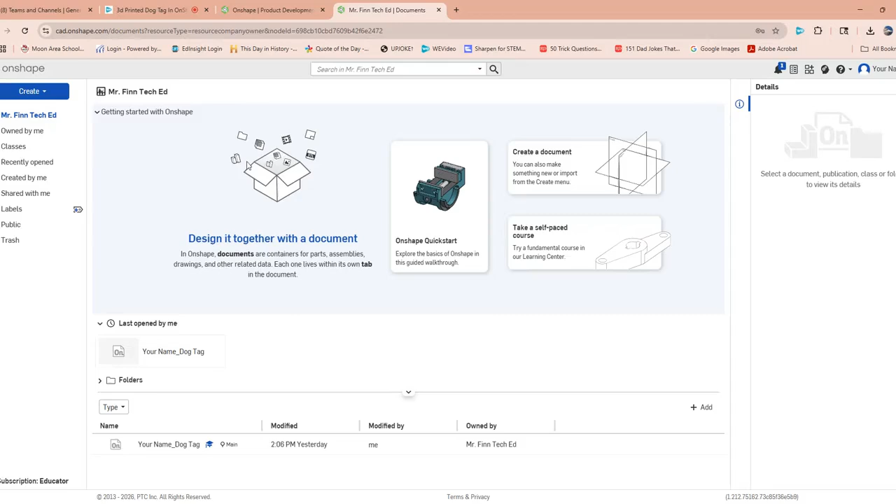All right, from here, you're going to click Classes. You're going to go Mr. Finn Tech Ed 8 or whatever class you're in here. And in this case, I have an assignment out here called Dog Tag. If you've already started it, you can click here.

But if you have not already started it, it'll just take you straight to it. But here, I'm going to click in this little submission document here. It'll take you to where we need to go.

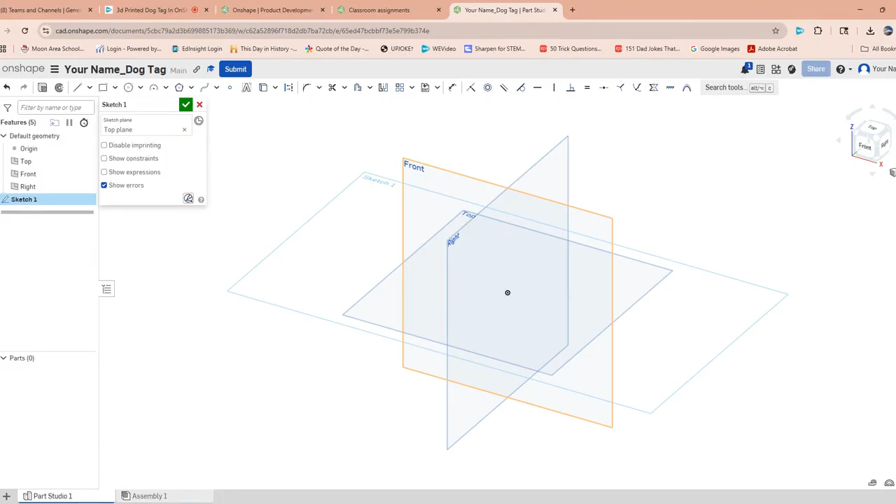Now, in OnShape, we've got a number of different planes here, and we're going to draw this thing in the top plane. So we're going to click Sketch. We're going to click our top plane. And we'll select that. And what you're going to do on the keyboard is you're going to hit Shift 5, which is going to take you to the top view. So now we're looking down on top of this.

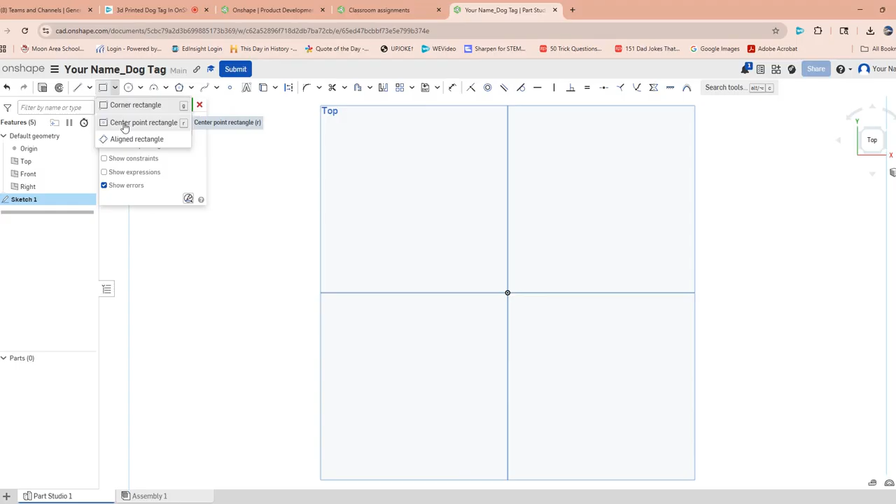Now in this case, we're going to start off by dragging a rectangle. And what we want to do is select a certain rectangle just so it can line up with future drawings. We're going to select center point rectangle. We're going to click that center point and drag out our rectangle. And you can click just one time, left click, and that'll give you the opportunity to set up our length.

And our length here in this case is going to be 2. You can hit tab, and we want to be in inches. And our height here is going to be 1.25. Hit enter. You've got your square drawn.

Now, dog tags don't have square corners, so we do want to create what's called a fillet. A fillet can be done here, still in the sketch menu. We're going to click fillet, or Shift F if you're more comfortable with keyboard commands. Now, fillet, you're going to click these 2 corners. Click, click. And what you're going to do is set that radius at 0.5.

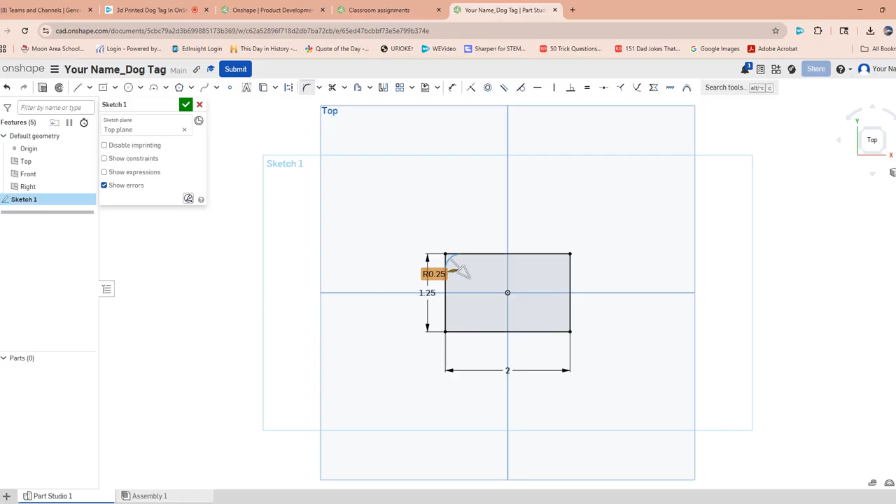0.5. Hit enter. Now that's going to default the other corners, so it should be a little easier for you to do. Just click your corners. Hit enter. Click your corner. Click enter. Click your corner. Click enter. So now we've got that done.

Now the next thing that we want to do is put a hole in this dog tag for our chain to go through. So in this case, we're just going to select center point circle here, or on the keyboard you can use just a regular old C.

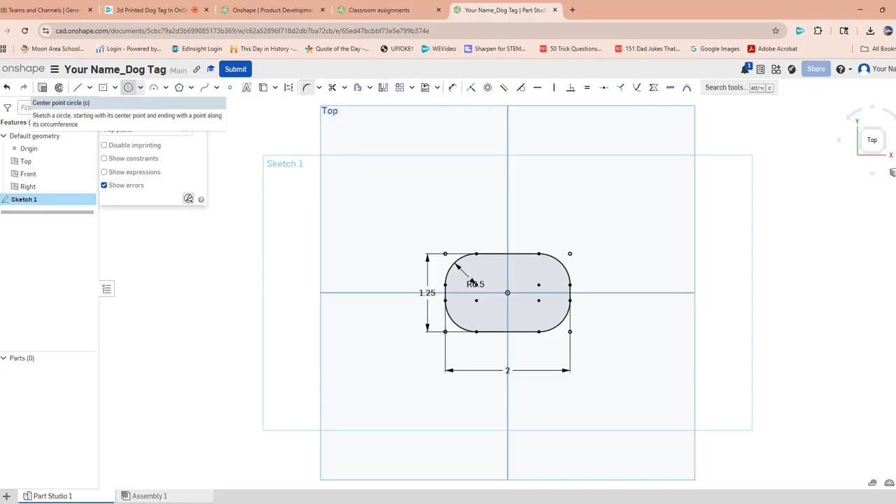We're going to set our center point. You want to zoom in a little bit by rolling in on the mouse wheel here, and you want to kind of find this little edge, and you'll see where it marks the midpoint. You're going to work your way over a little bit. You can put it anywhere for now.

You're going to click and drag that circle out, and you're going to enter the dimension 0.125. And you can click enter. So we've got our hole marked here. Now we've got to get our distance in between the hole and the edge of the tag.

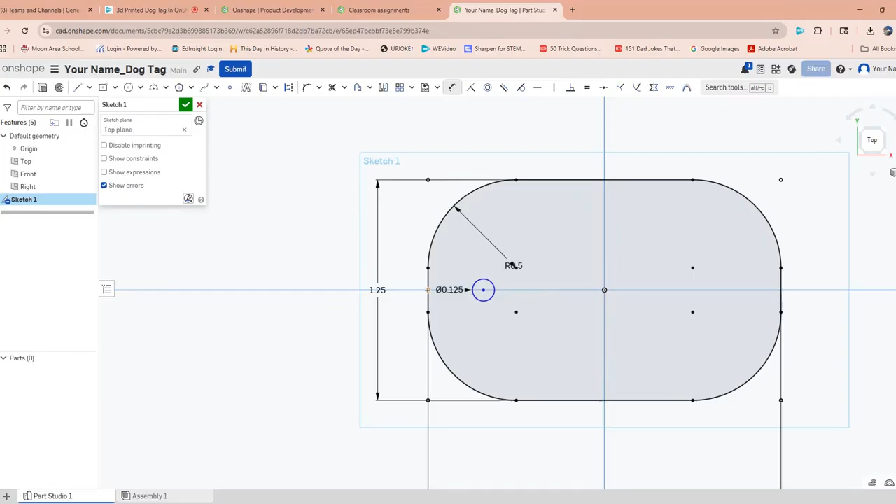And in this case, we're going to have to use the dimension tool. You can either use that or D on the keyboard. Dimension tool. We're going to click our edge, and we're going to click the center of that circle, drag it up here, and we're going to type 0.13 and hit enter.

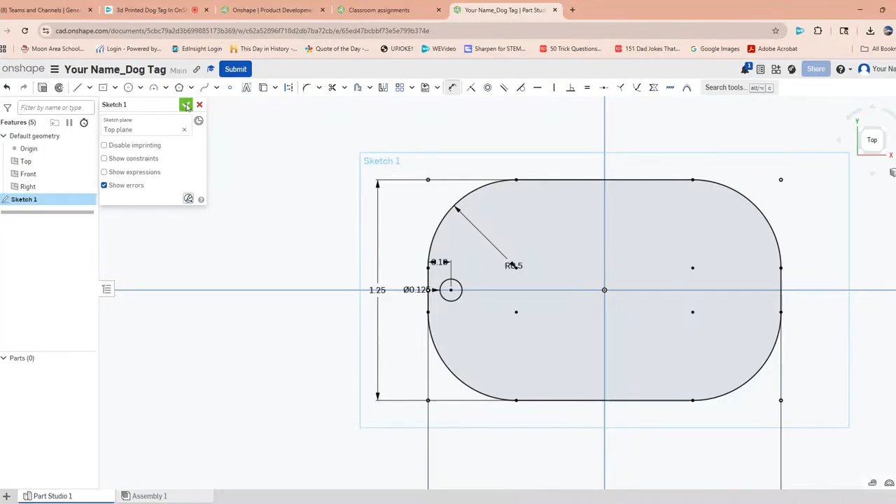So now at this point, we've got the base of our dog tag selected. We can actually go back in here and just say we're done with this sketch. Now it's going to close out that sketch, but if we do a Shift 7, it'll put us in what's called an isometric view. So now we're kind of looking at it.

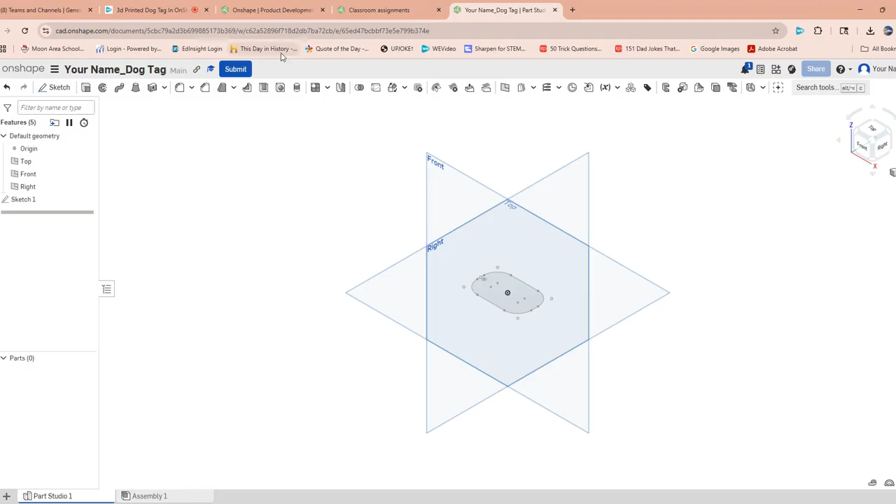This would be almost like this is our 3D printer here. And we're going to use a command called extrude. Now I would zoom in a little bit by rolling in on your mouse, and you click extrude.

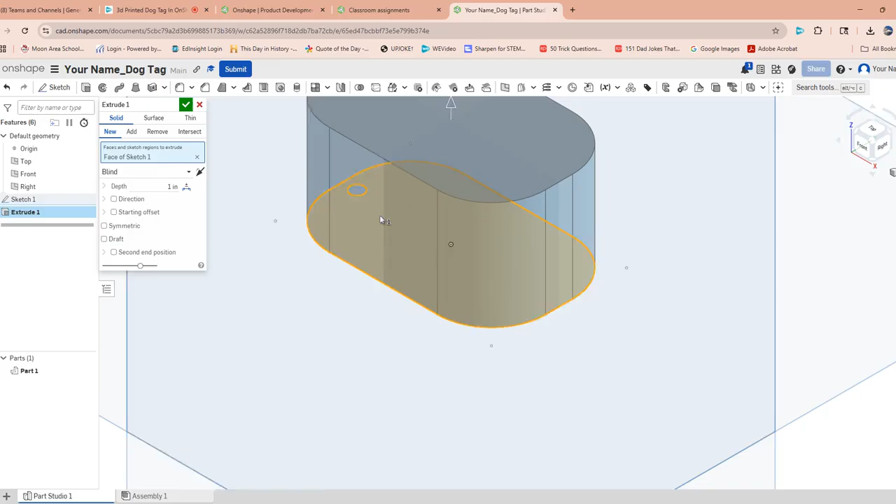We're going to click this shape here. Now, we don't want this center, so hopefully we can avoid clicking that by staying outside of that center area. Click it, and look at that—we start to make this thing 3D. The only difference here is our direction; we're going to come up out of it, which already looks like it defaults to that here in OnShape.

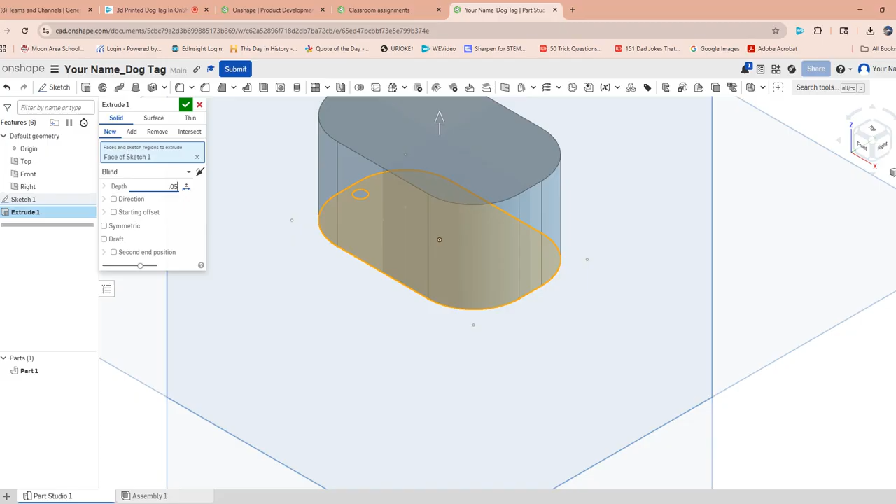From here, we're going to extrude this portion here. We're going to type 0.05, so we now have ourselves a three-dimensional object here. You can click check, and we're in good shape here.

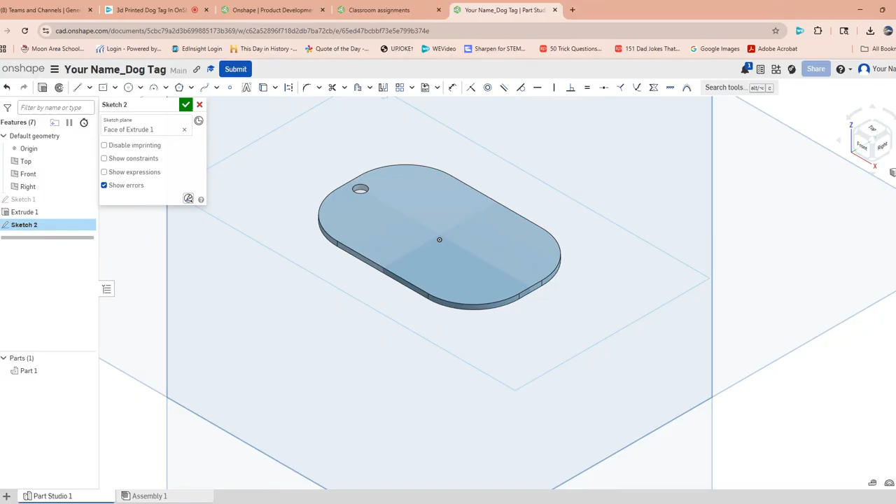Now the next thing we do, we want to give it a little bit of a contour. So if we want to, we can actually create a new sketch. We click this sketch, select the face where you want to do this drawing, and click sketch here. Then we're going to do a Shift 5, which will take us into that top view again.

In this case here, we're going to use a command called offset. Offset is here—as we make our way back, we're still in the Shift 5 view looking down on the top view, and we're going to take our offset command. Scratch that, we're going to need to add a new sketch, pick where we're sketching, and in this case we can use our offset command.

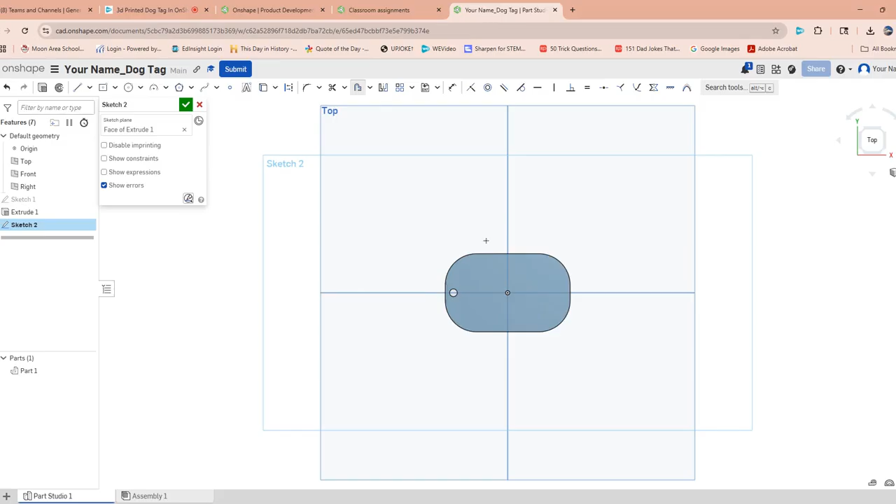And we want to click our arrow here, and we're going to drag this arrow so it's kind of inside. It doesn't have to be any exact science here—that's fine, we're good with that.

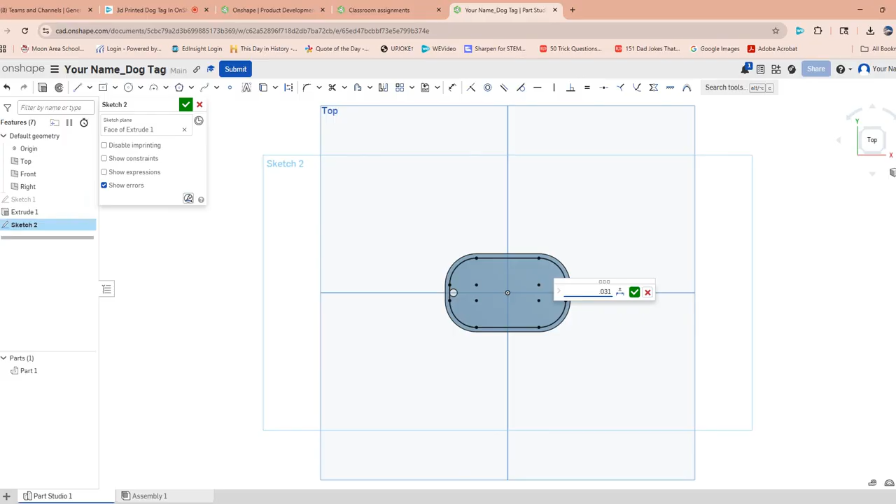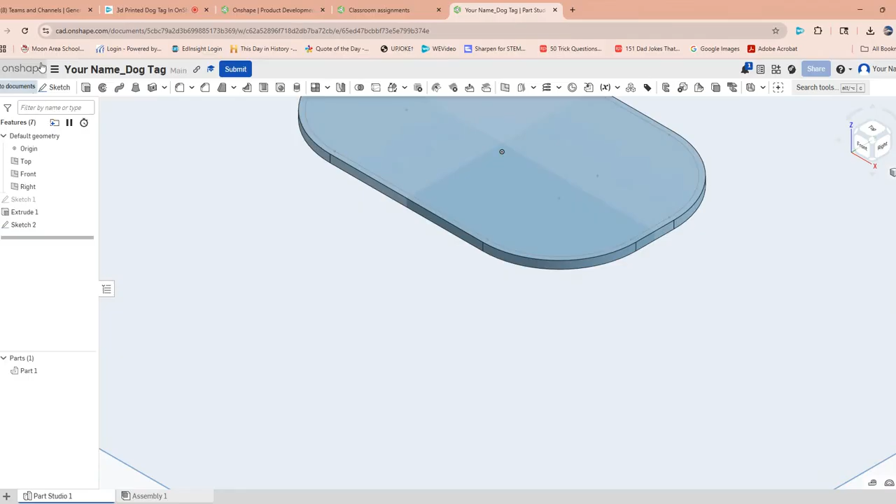We can click Finish Sketch. We're going to do a Shift 7, which will put us back to the isometric view. We're going to roll in, and we want to extrude that lip that we just drew. So you can select Extrude or Shift E.

It's going to tell us we want to extrude, but wow, that's way too much. So we're going to have to adjust that, and it'll be 0.0156. So we've now got a dog tag with a lip on one side.

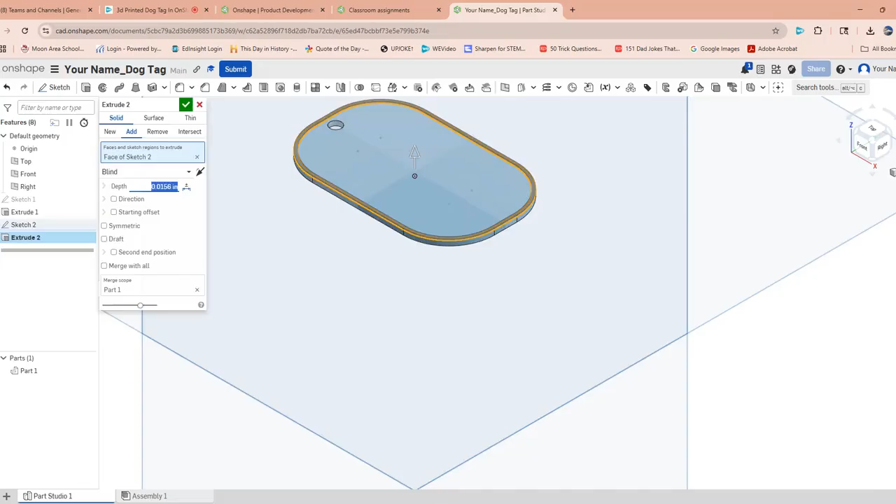Lip on the one side of the dog tag. We need to take it to the bottom here, so I'll show you another way to move things around here. If you right-click on the mouse, you can kind of zoom and move around a little bit. We're going to see the bottom of the dog tag here in this case.

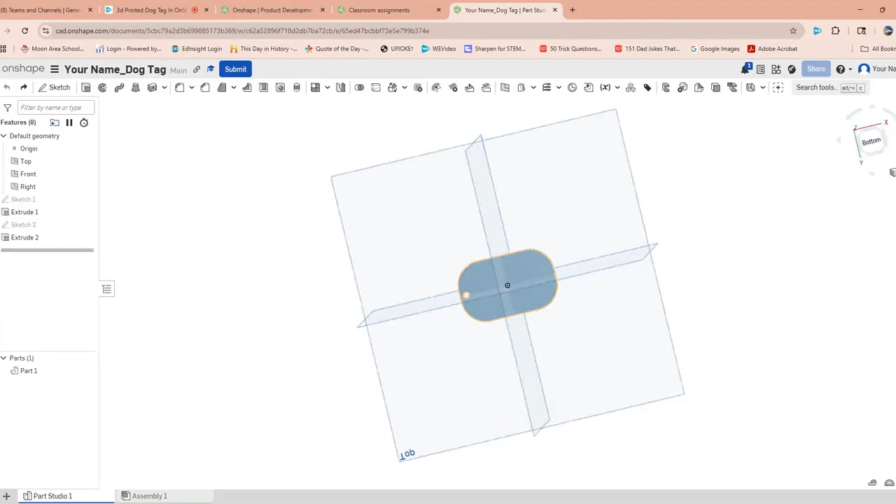You could also do what I believe is a Shift 6, which will also move you to the bottom here. But again, you can move this around by right-clicking, or you can also use our little cube over here as well. Either way, what we're going to do here is click on the bottom.

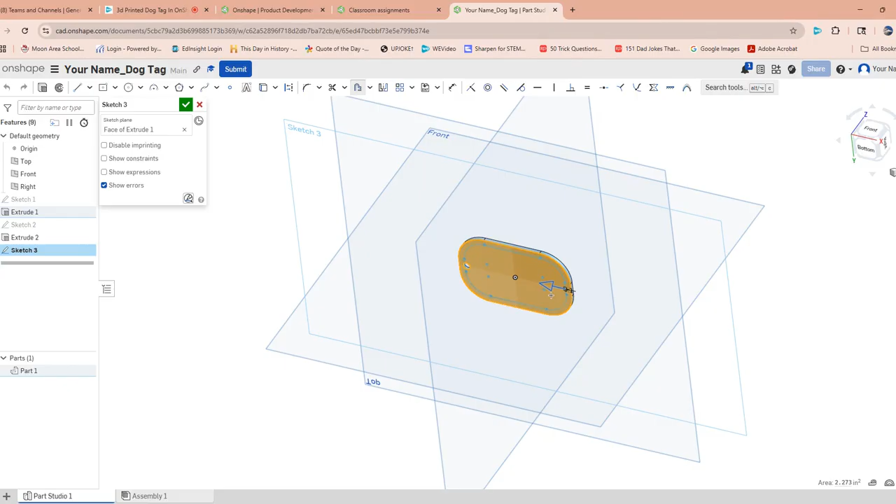We're going to click Sketch. We're now on the bottom of that plane there, and we're going to use our offset again. Click our offset, want to adjust our arrow so that it goes inside—it doesn't matter—and then hit Enter, and you're going to enter 0.031.

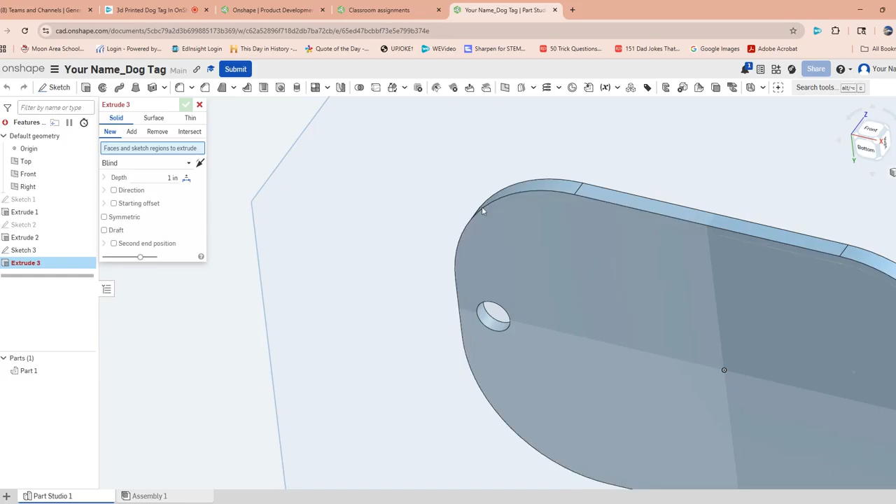Enter. So now we've created a bottom part here that we're going to need to extrude. So what we will need to do here, we click our sketch—is good. We'll do our extrude again here, and we're going to zoom in so we can see that extra little bottom piece there. So we're looking at it from the bottom.

Obviously we don't want it 1 inch, we want it 0.0156. Click Enter. So now if you hold down the right click button, you can now see we've got a fully looking dog tag here.

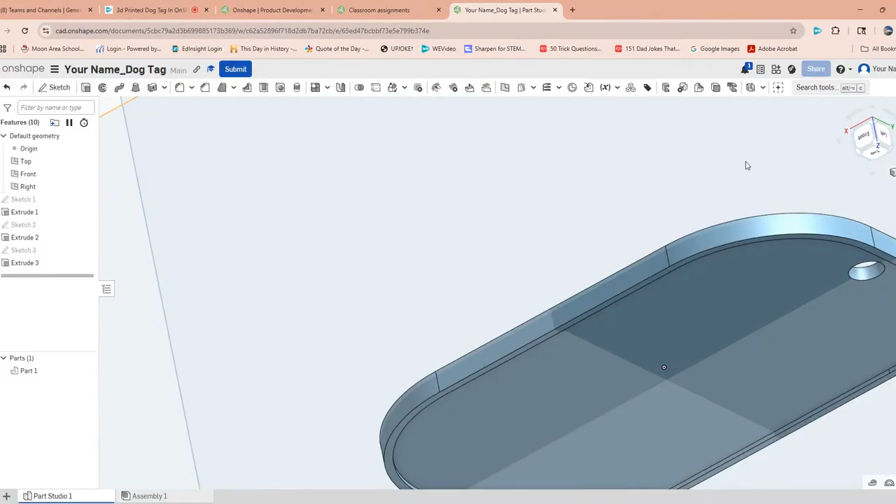Let's go back to our main view here. Sometimes you can get there by hitting Shift 7—it'll put us back in our isometric. So we're done there with our lips on our dog tag now. We've got extruded and we've got our two-sided dog tag.

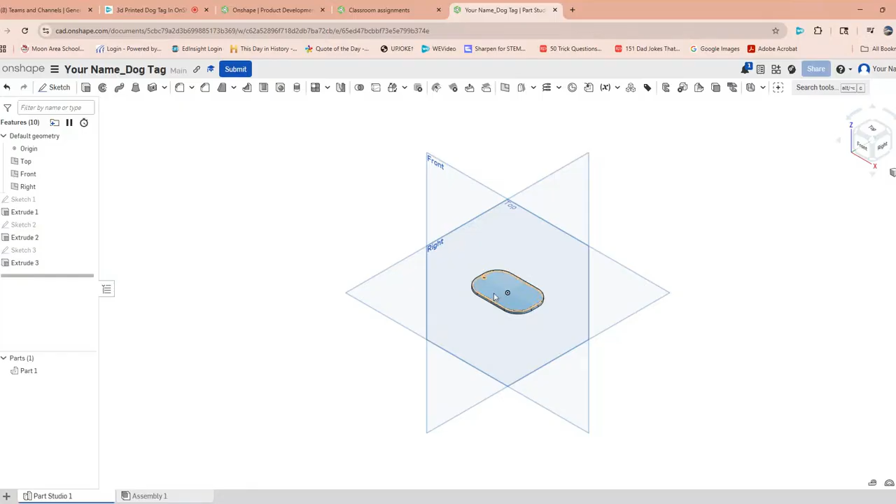Now what we're going to do is, every dog tag has some kind of information or a name on it. We're going to do that by doing another sketch on this top view here. So if we select Sketch, it's going to ask us what plane we want to be on—we're going to select the top of the dog tag. So now we're on top of here on Sketch 4.

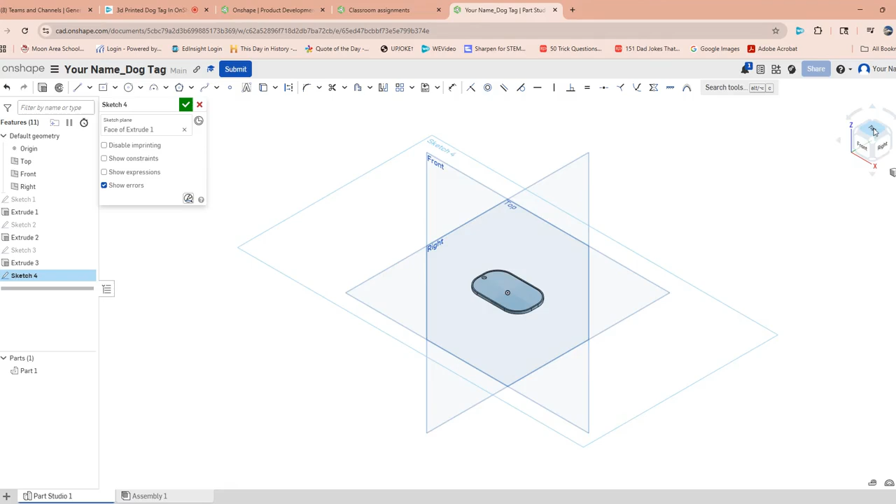And if we want to do another Shift 5, it'll bring us back to that top view. You could also do it here on the cube. Either way, we're going to start adding some text.

So now we've got text. What you can do is make a little text box inside of your dog tag and type your name. I'd recommend capitals and bold as well.

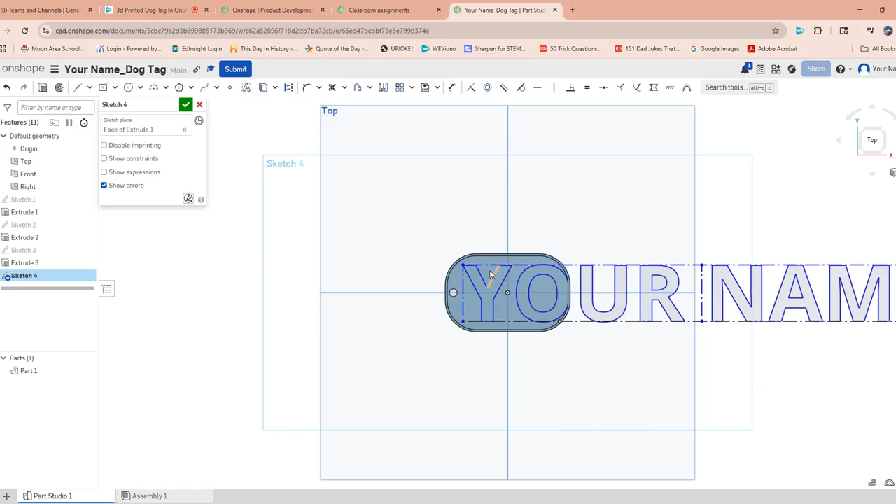Now obviously that's way too big. We're going to have to transform that in our next process here. Obviously we have to change the size of this, since it's not going to fit on our dog tag.

So we're going to use what's called the transform key. It may be up here - you might not see it, but there's a drop down with either the circular or the linear pattern. We're going to select transform, and select our name here.

Now this gives you some options. You can make it really big or really small. In this case, we're going to make it so it'll fit in our dog tag.

Then when you select this little square, you can move it to the center of your dog tag. If you want it a little bigger, you can drag it a little bigger - about what we've got there. Drag it in so you're on your center line.

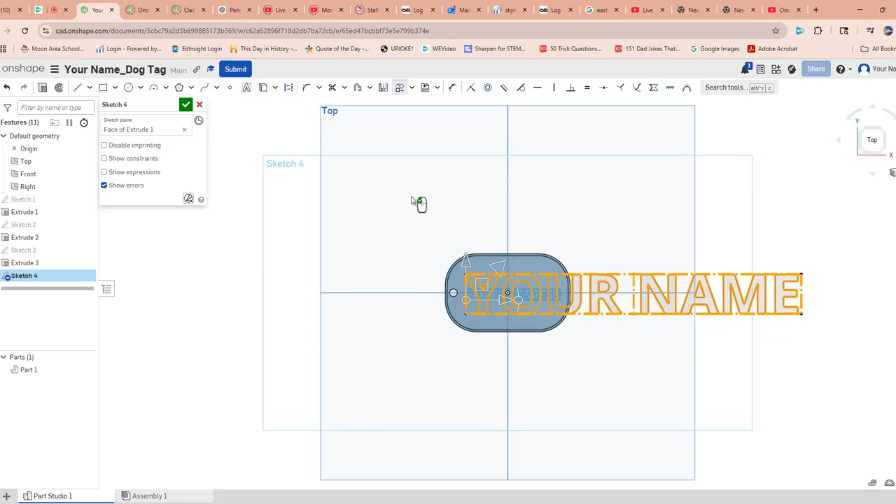You're going to left click anywhere outside of where you're working, and at that point it'll shrink that down for you. Now we got that shrunk down.

Now we need to extrude it. So we're going to go back into the isometric view, which can also be done with Shift 7, or you can select it here as well. We're going to extrude those letters.

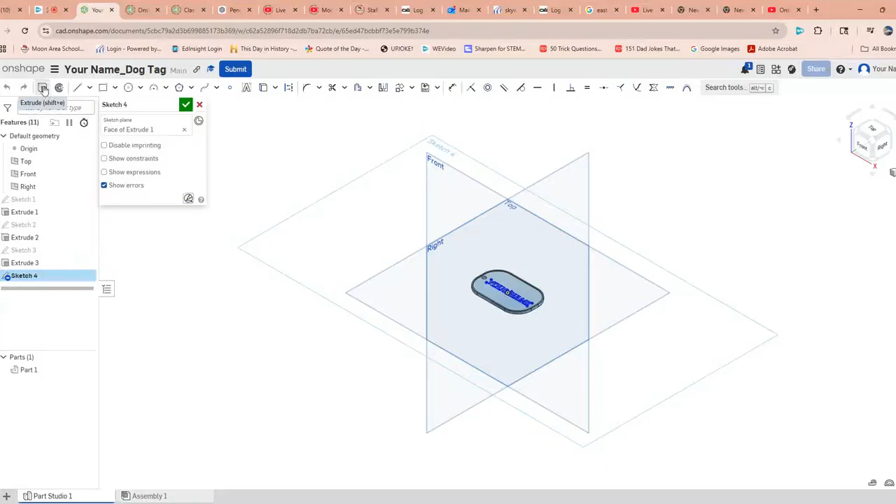And what happens here, you'll see it's coming through. We've got it - I'm going to set the direction of where it's going to be extruded from. In this case it defaulted to just coming up and out of our top view, but if you needed to change that, you could.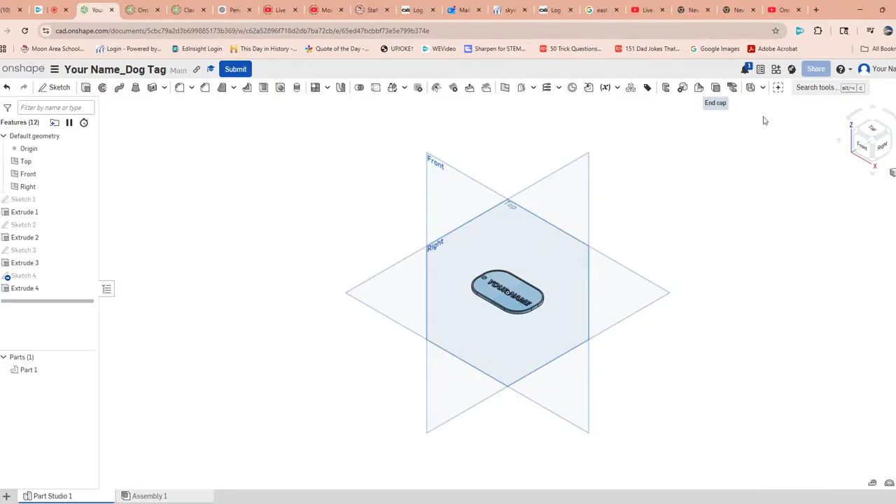But really what we're going to do is adjust this, and we're going to say 0.0156. Hit enter, select check. Now if you zoom in here, we've got ourselves a dog tag.

There's a dog tag here, and what you're going to do when you have that ready is click submit. That will go to our class file that I have already created.

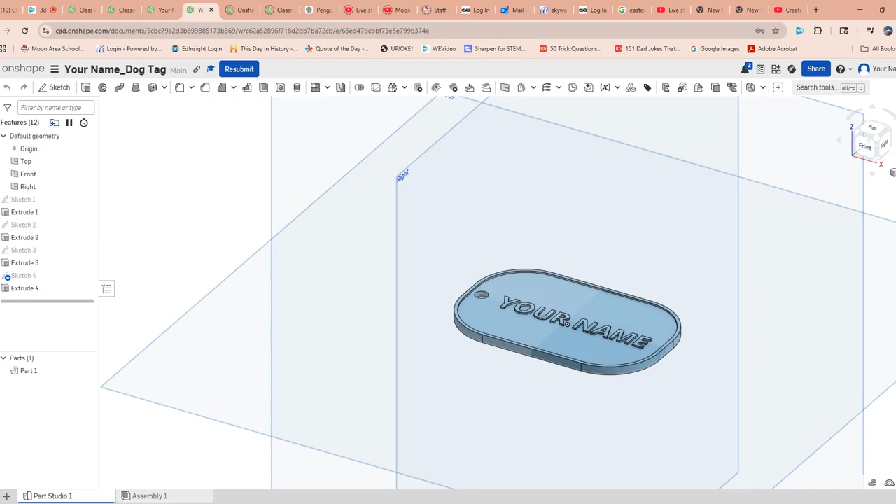Now, you're also going to want to make this one - we're actually going to give you the opportunity to print it out on our 3D printer. So if that's the case, if we zoom out a little bit here, over on the left-hand side you'll see where it says Part 1.

If you right-click, you have the opportunity to export. Now it's going to ask you where you want to export, and we want to change this to an STL file so it sees our 3D printer.

You're going to make sure that you call it your name. Obviously, you'll use your own name.

We're going to select here, leave this all alone. One thing we will have to change is our units - make sure your units are inches, because that's what we drew that in. So we've got your name, STL, inches, resolution - it's fine, you can leave it at any one of these. I mean, let's go with just fine since I said that.

And then you're going to download, and then here you're going to click your export. It's going to export, and you're going to see this is going to go straight to your downloads for whatever reason.

But what you're going to want to do here is come up to this little tab under Show in Folder. And when we get to our Show in Folder, it'll kind of take you where you need to go here.

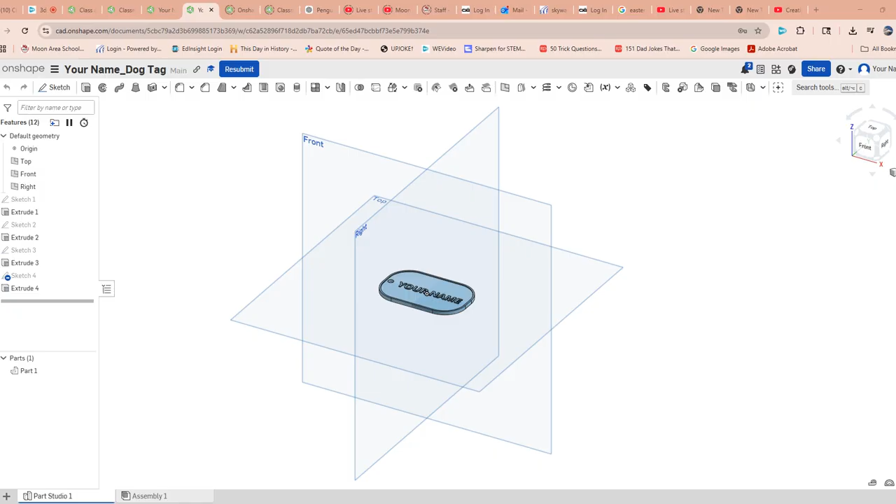In this case, you're going to save it, go to Tiger Tag, and paste or Control V and paste here. And that will be how I access it in order to send it to our 3D printer for you guys to have your own dog tag.